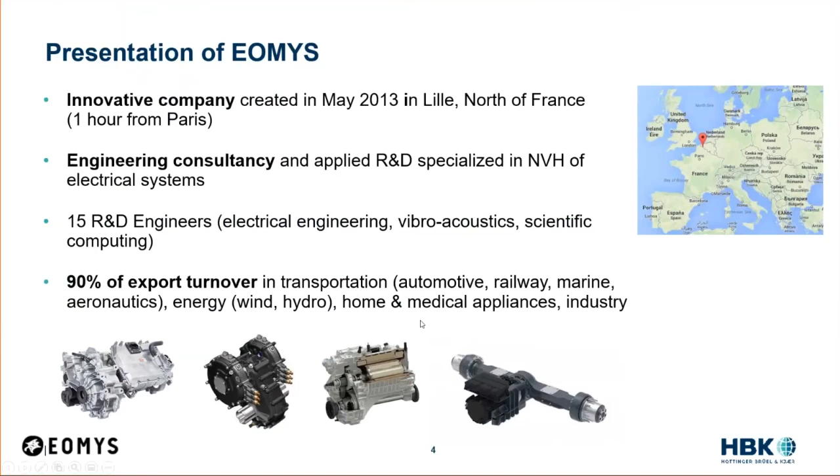So what we do at EOMYS is we propose a large choice of consulting services, starting from troubleshooting of NVH issues in electrical systems. It's mainly done via measurement, but also simulation. We also optimize the design of electrical systems, mainly based on simulation. On top of that, we provide technical trainings on vibroacoustics of electrical systems, and we develop and distribute our own software, which is called Manatee.

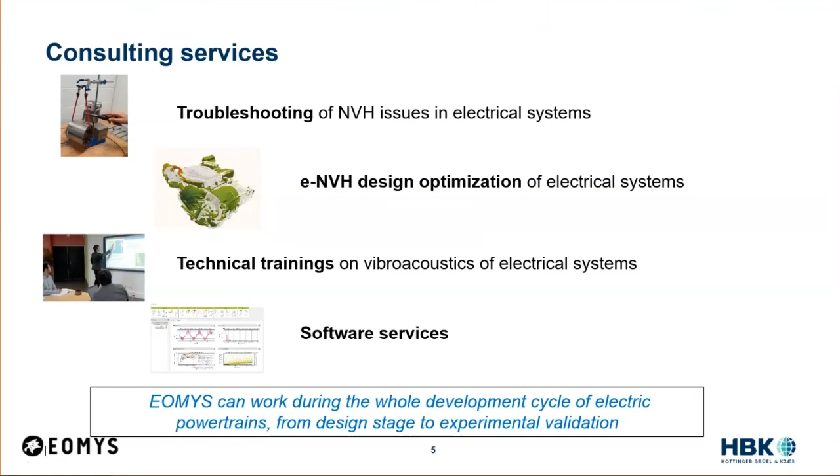So globally, EOMYS can really work during the whole development cycle of electric powertrains, from design stage up to the final experimental validation. So why is it important to work on e-NVH? Just choosing the topology of the machine or the slot pole combination, we've seen from EOMYS experience that it can have a large impact on NVH due to magnetic forces.

The e-motor designers have to work, of course, on the electromagnetic parts, on the heat transfer parts, but more and more they need to integrate the vibroacoustic part as well. And the thing with vibroacoustics is to really understand the e-NVH excitations. They are pretty complex, and their transfer paths are pretty complex as well. The noise issue can come from a force on the rotor or on the stator. It can be due to a radial force or a tangential force.

The propagation can be airborne or structure-borne. And the noise issue can be due to a resonance or not. It can be due to a specific slotting harmonic or a switching harmonic on the machine. And it can impact as well the global sound quality of the product. So that's why it's very key to integrate noise and vibration in the design of electric machines.

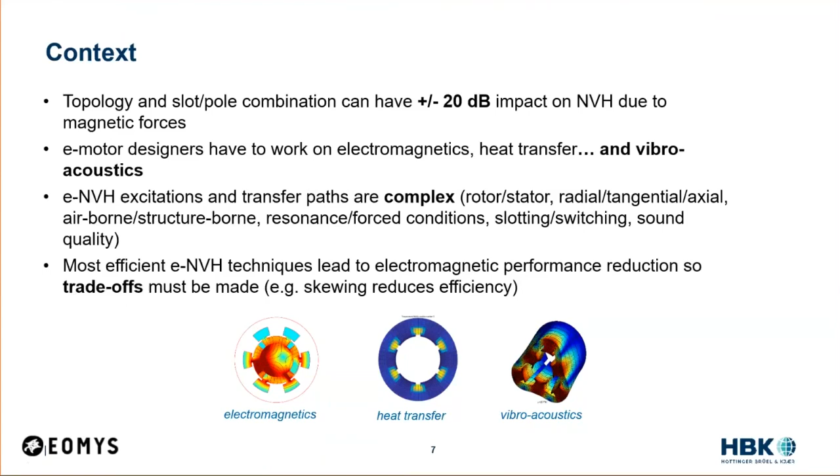But to analyze the e-NVH, the first thing will be to really understand the generation process of this noise due to magnetic excitation. The idea is to start with the current, which is going to create electromagnetic forces on the stator teeth. Those magnetic forces then make the structure vibrate, which will then create some noise if it occurs at an audible frequency.

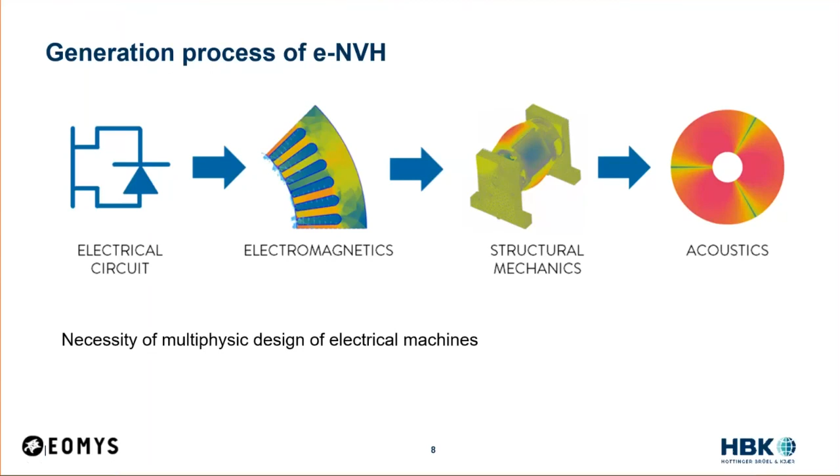So to really assess the noise due to electromagnetic excitation, the idea is not to focus on the acoustics, but to integrate the full multi-physics design of the electric machine. It is important to really understand the source of the noise problem. Usually we associate a given magnetic force with a frequency, a specific harmonic. But we characterize a given magnetic force as well by its wave number, which corresponds to the spatial distribution of the force along the air gap.

So here you have an animation made with Manatee software, where you can see as a function of time the distribution of the forces applied on a stator tooth. But actually, these global forces can be decomposed as a superposition of several magnetic forces. Here you have the magnetic forces of wave number r equal to 0.

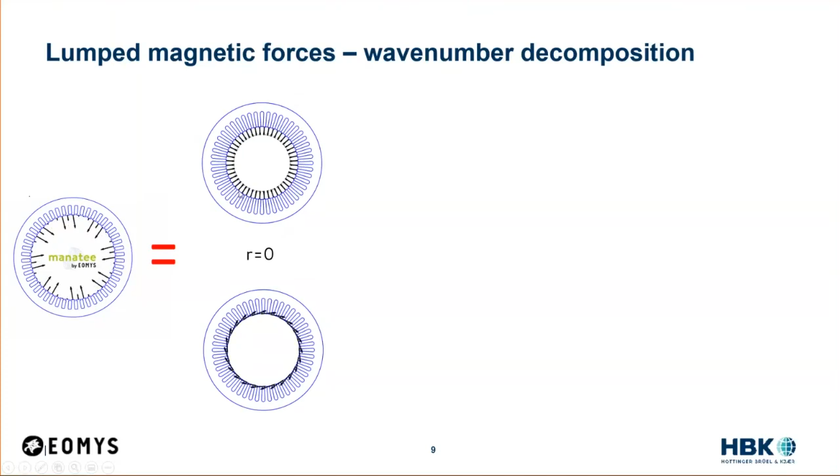So why it is equal to 0 is because along the air gap, you can see that there is the same amplitude of the force. So here we have an example of pulsating radial forces where the forces are radial, and in the bottom it's a tangential pulsating force. So it's what corresponds to torque ripple, for instance.

And then the combination includes as well some forces of wave number r equal to 1, where you see in function of the circumference, there is one maxima, one minima at a time. That's why it's r equal to 1. And in the radial direction, this corresponds to the unbalanced magnetic pull.

And after 1, there is 2. So you can see here an example of a force of wave number plus 2, where there are two maxima and two minima at a given time. So this is in radial direction again, and you can do it up to a very high wave number.

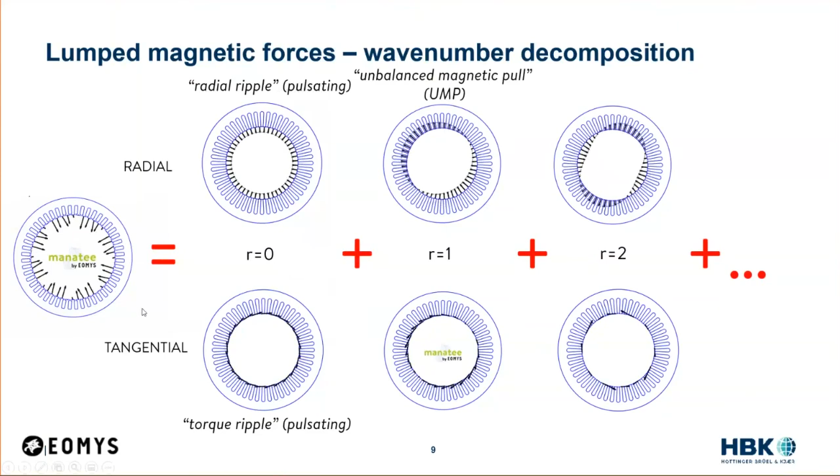So from there, you see how to characterize a given force. And it's actually very important to identify when dealing with a noise issue, to have the link between the forces and the noise. So it's what Manatee can help you with.

So this software's objective is really to improve the NVH performances of electrical systems throughout their development life. So the idea is to make the link between the e-machine geometry and its control parameters to the system level sound power level due to magnetic forces.

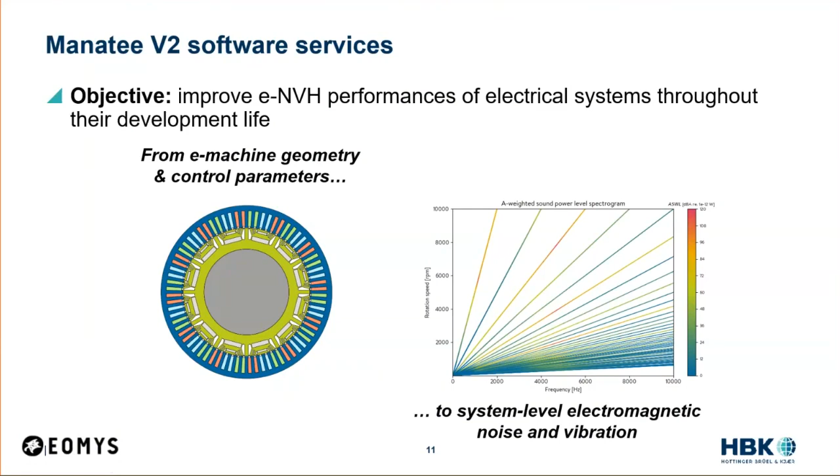So Manatee is the only software specialized on the electromagnetic design optimization of electrical systems. It includes, of course, the magnetic vibrations and acoustic noise due to Maxwell forces. So the software provides some predefined simulation workflows, which is very handy to set up quickly a simulation. So some of the workflows are dedicated to early design phase, and other workflows are more detailed.

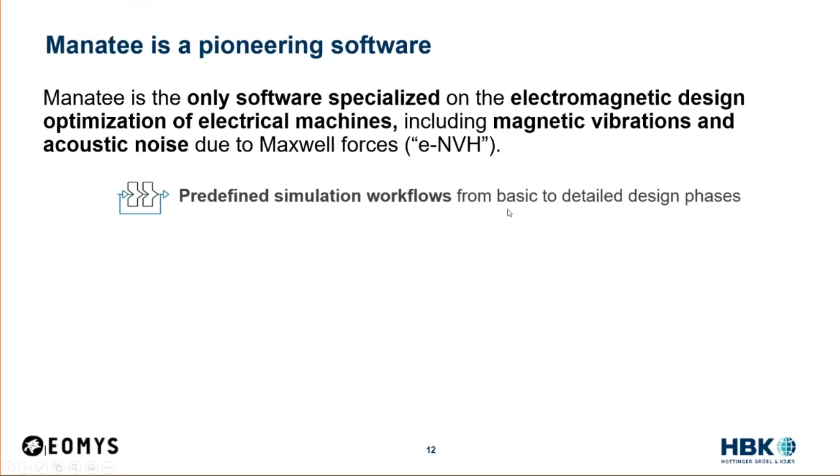Then it will provide you fast and accurate calculations, and Manatee can be used as well to study the impact of manufacturing tolerance, for instance, and assess the robustness of an existing design. And it can as well help you to identify the root cause of the noise problem based on automated post-processing you can access at the end of the simulation.

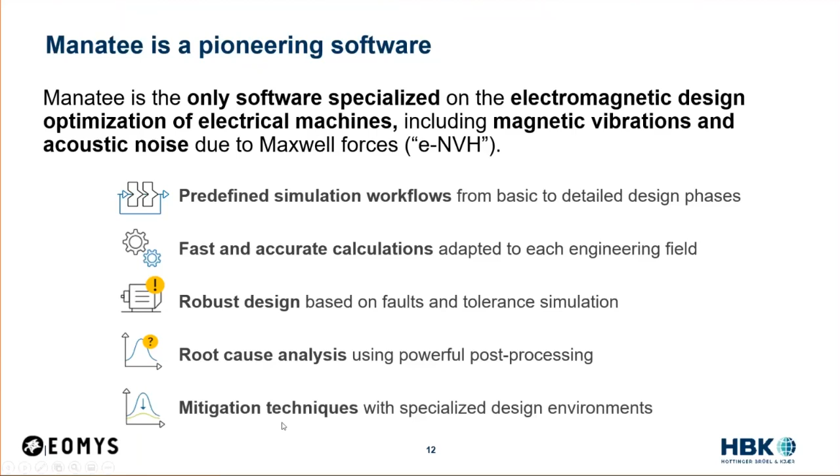And of course, here you can apply specific mitigation techniques such as skewing to reduce the noise of your machine. So this software has been inspired by EOMYS consulting experience, where EOMYS was able to reduce up to 40 dB the noise on a given design. EOMYS has experience on more than 170 industrial cases through a wide range of topologies and through a wide range of applications.

So the idea with the software is really to provide an integrated e-NVH simulation and analysis environment to electrical engineers, to mechanical engineers, and to acoustic and test engineers. So the current version addresses mainly the electrical and the mechanical engineers. And in the future, we will integrate more features dedicated to acoustic and test engineers.

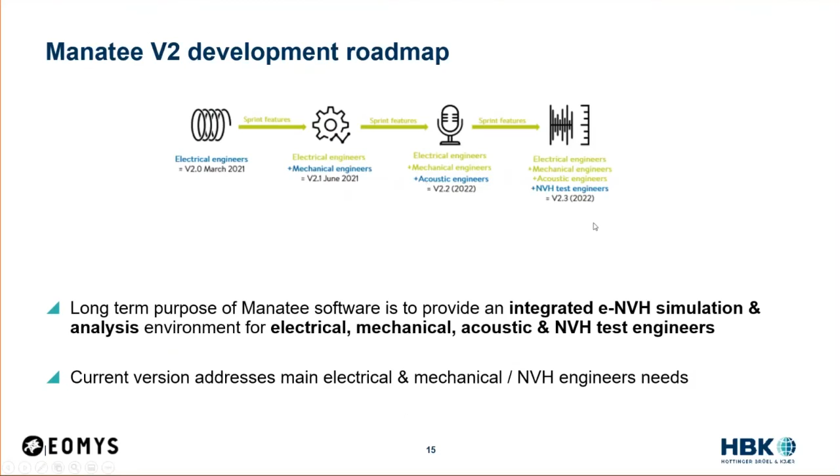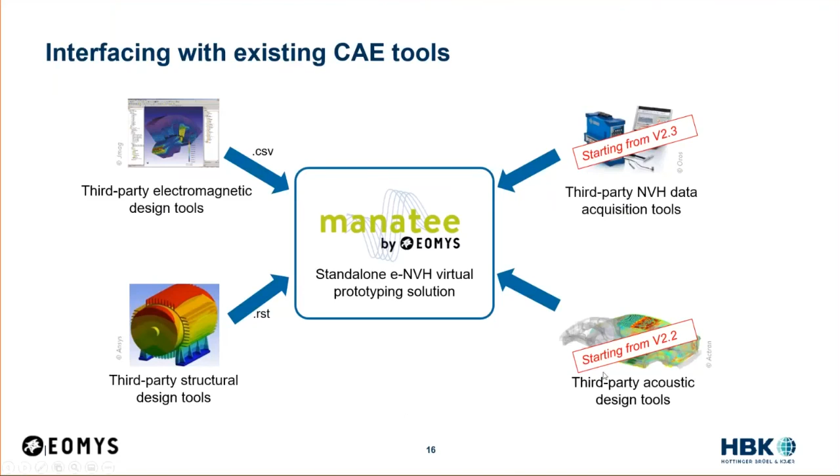So what Manatee can do as well is being interfaced with existing CAE tools. So for instance, here it's possible to import some electromagnetic flux calculated with JMAG software. Here from the mechanical side, it's possible to import some modal analysis results calculated with ANSYS, or it can be OptiStruct. And in the future, it will be possible as well to integrate some test data so that a direct comparison between measurement and simulation can be done. And we plan as well to make possible the import of radiation efficiency from Actran software, for instance.

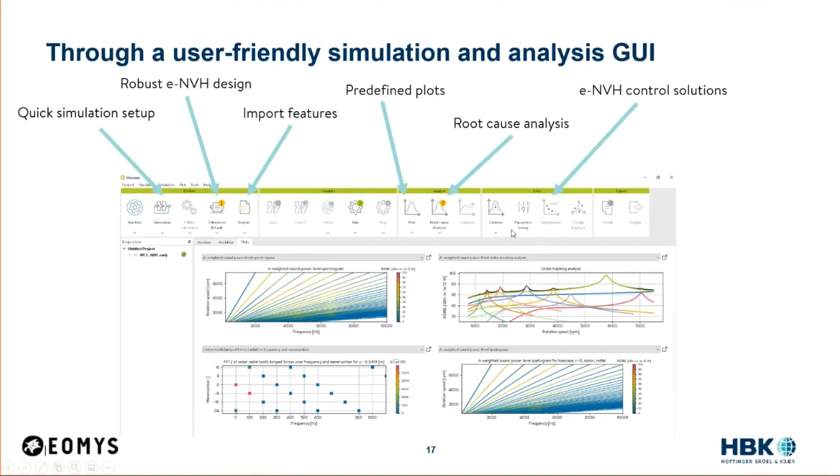So if you have a look at the user interface of the software, just by looking at the icon banner, you get an idea of how to use Manatee. So first, there is a need to define the machine. And then the idea is to select a predefined workflow, to apply or not some tolerances. And then you can save and run the simulation. And from there, you have access to predefined plots. You have an example there, which will allow you to better understand the origin of the noise issue. And once it's done, you can solve the noise problem by integrating specific solutions.

So why is Manatee fast and accurate? The first thing to mention compared to general CAE tools is that it's really easy to set up the simulation with Manatee. So even if there are multi-physics models behind, everything is well predefined with Manatee. So there are different workflows you can select by default. Some will be more dedicated to early design stage, others to more advanced design stage. And you'll see that here you'll get an automatic coupling between the magnetic model and the force model, for instance, between the force and the vibration, and between the vibration and the acoustic.

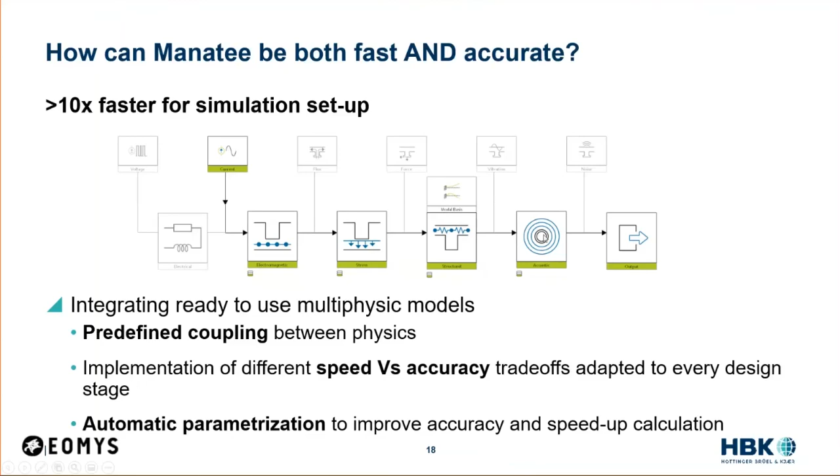Then, in terms of calculation time, Manatee is very fast. The first reason is from the magnetic model. Usually, the magnetic flux are represented using what we call a magnetic lookup table, which then allow you to speed up calculation at variable speed. So this is by using flux interpolation or flux extrapolation.

Then, from the structural point of view, as it's possible to import modal bases from ANSYS or OptiStruct, we've seen that the import can be performed offline, so that offline, the software is calculating the response of modal shape envelope nodes to some specific load case. So the load case here will be the different magnetic forces, for instance, a magnetic force associated to wave number 0 and applied in a radial direction.

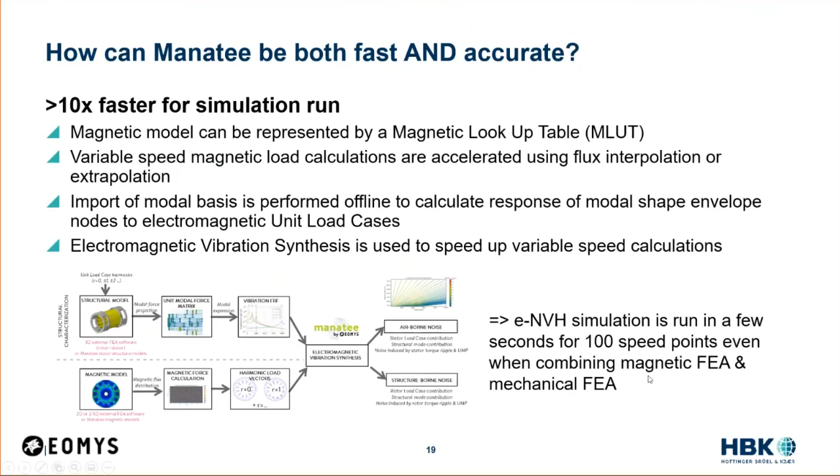And then we'll be using the electromagnetic vibration synthesis here, which is combining on one side the structural behavior, on the other side the magnetic behavior, to calculate airborne and structure-borne noise at variable speeds. So within few seconds, you get access to 100 speed points, even when magnetic FEA and mechanical FEA are used.

Then another advantage of Manatee is that the post-processing is automatized, and by default you get access to the 4 most relevant visualizations. So here, for instance, you see a spectrogram of sound power level in dBA, which is highlighted, together with the order tracking analysis. Then by default here you have access as well to the 2D plot of the forces. We'll come to that a bit in more detail just after.

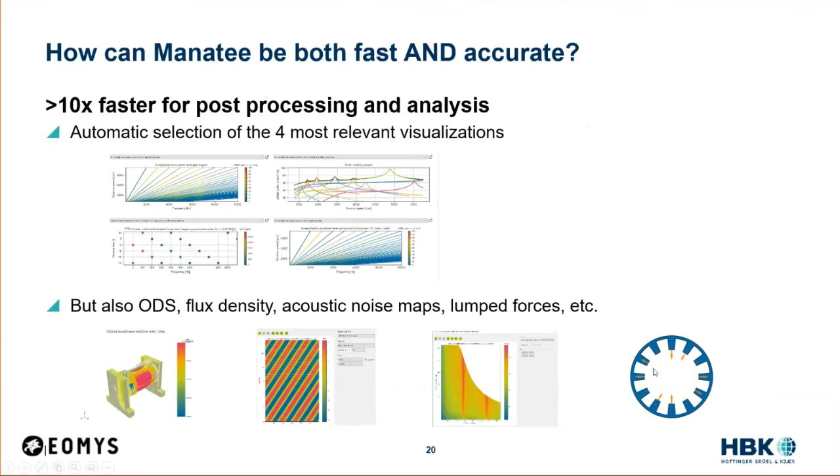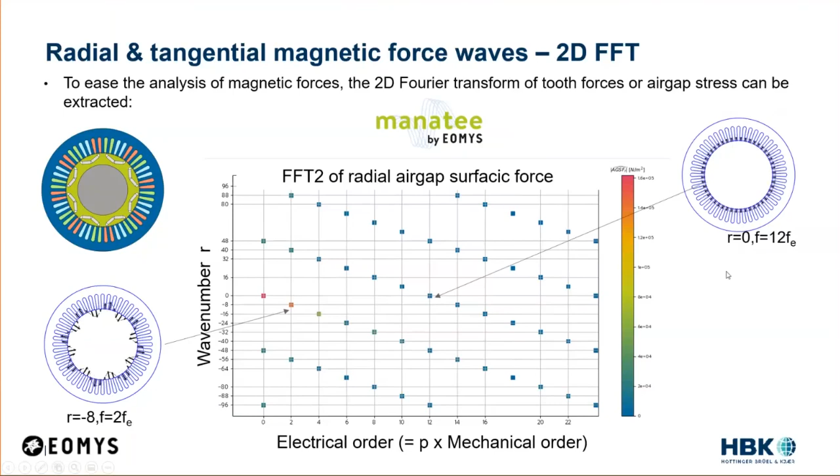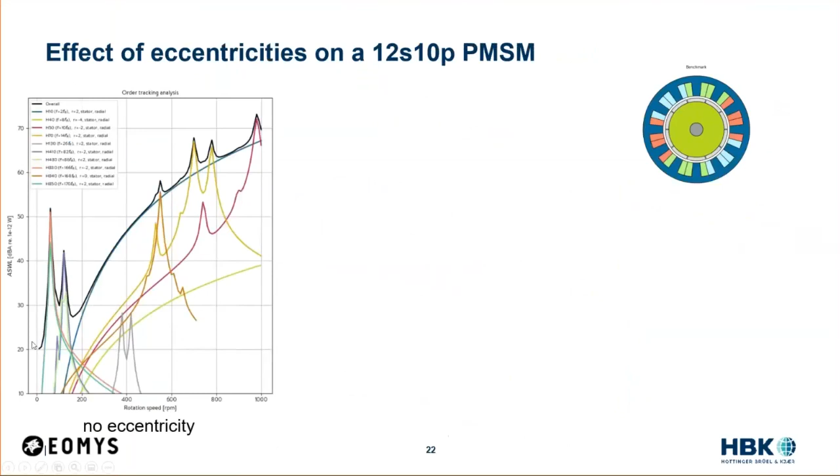Then we've talked about the possibility to study some eccentricity defaults. So here on a different machine, you have an example of the order tracking we get without any defaults. And then by applying 20% of static eccentricity, you can see here that there is a new resonance which is occurring. And this new resonance is associated to a wave number 1.

And looking at the operational deflection shape from this excitation, you see that the peak corresponds to a bending mode. So actually, it's what we would expect: an excitation of wave number 1 being in resonance with a bending mode.

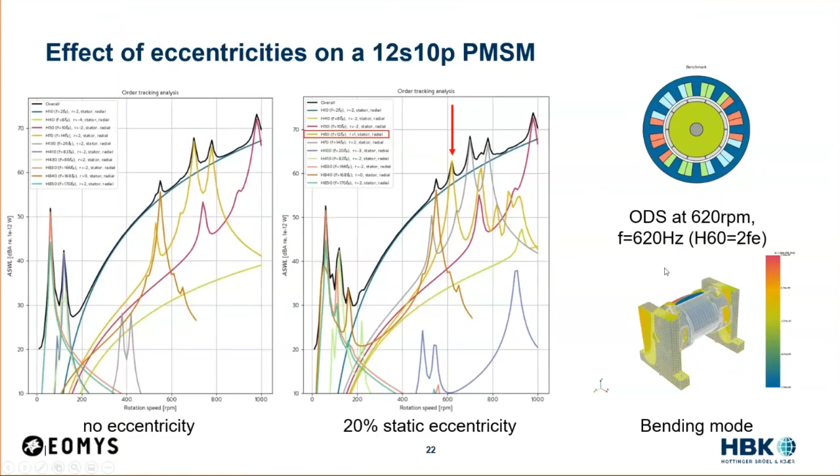Then here is an example of a design optimization. So the rotor can be skewed in different ways. The skew can be linear, in V-shape, or in zigzag shape, as it's shown. And depending on that, you'll have a different impact on the sound power level. So in this typical example, you see that there is up to 10 dB benefit using the V-shape, but this is very specific to the motor we studied. And you see here as well that whenever the rotor was skewed, there was a negative impact on the torque, of course.

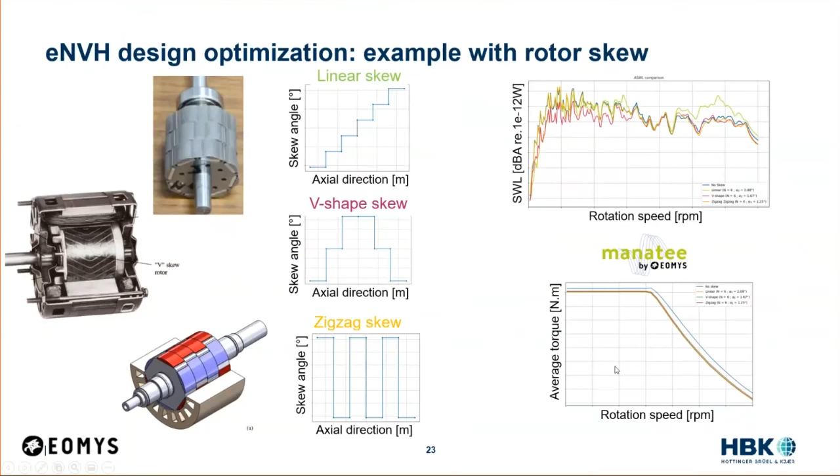So to summarize, Manatee software is a pioneering software specialized in the assessment of magnetic forces, vibration, and acoustic noise. It allows you to troubleshoot and reduce the noise of electric systems. And it's made to make the collaboration between electrical, mechanical, and acoustic engineers easier. And it's developed based on our experience at EOMYS. So this is mainly focusing on simulation, but of course simulation always needs to be fitted based on experiments.

So I give the ball to Ed. Thank you for an excellent presentation.

Can I just ask you a quick question? Very early on, you mentioned that there were trade-offs whenever you were doing a design and picking optimal pole slots and skewing. Those kind of impact efficiency, but is it a large impact on efficiency generally in your design experience? Yeah, it can have a large impact on efficiency. That's why it's always needed to make some simulation to assess this impact, and as well to collaborate with electromagnetic engineers to make sure that everything is well controlled.

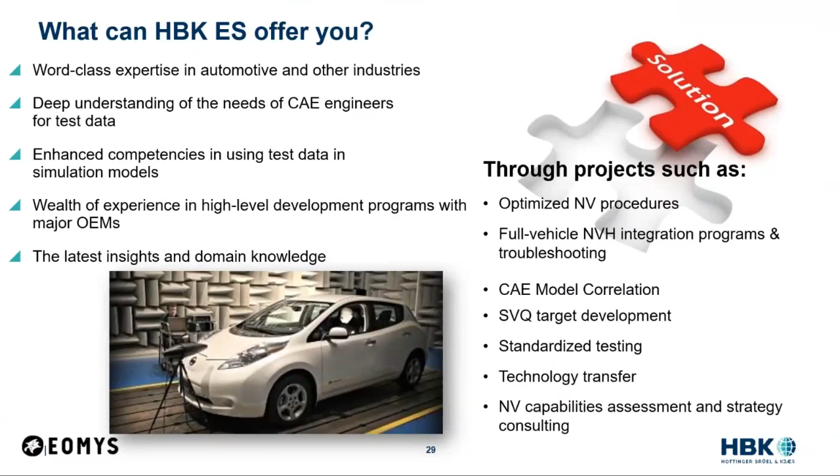I'm in a group called Engineering Services. Within B&K there are 1,000 employees making microphones, handheld sound meters and all the different types of equipment. But there's also a group of us that provide an expanded offering for our customers with measurement services, and that's what I do. There's 16 of us here in Detroit who do measurement services, specializing in noise and vibration. There's 6 people in the UK doing noise and vibration. There's about 40 people in Europe doing strain gauging and strain measurements, and a smaller group in Asia that do sound and vibration measurements and strain gauging. That's what the engineering services part of HBK does, and that's what I'm a part of.

I'm lucky enough working in Canton to work in a beautiful lab that we're co-located in, and we lease rooms from Material Sciences Corporation. We have a four-wheel drive NVH chassis dyno, a beautiful dyno. We also have 2 hemianechoic chambers that are huge. They're 25 feet by 35 feet by 14-foot roof, so they're big enough to pull a car or a small truck into. But we also do a lot of work with appliances.

We have a fully anechoic chamber, which has the fake floor and the wedges underneath. It's smaller, I think 14-foot by 14-foot by 10-foot roof, but it's also much quieter than the hemianechoic rooms. On a typical day, we're 16 or 17 dBA in that room. So it's a very quiet room, and it's great for measuring electrical equipment because it's generally quieter. We also have a sound transmission loss suite, with connected reverb and anechoic rooms that we can use to measure sound transmission loss.

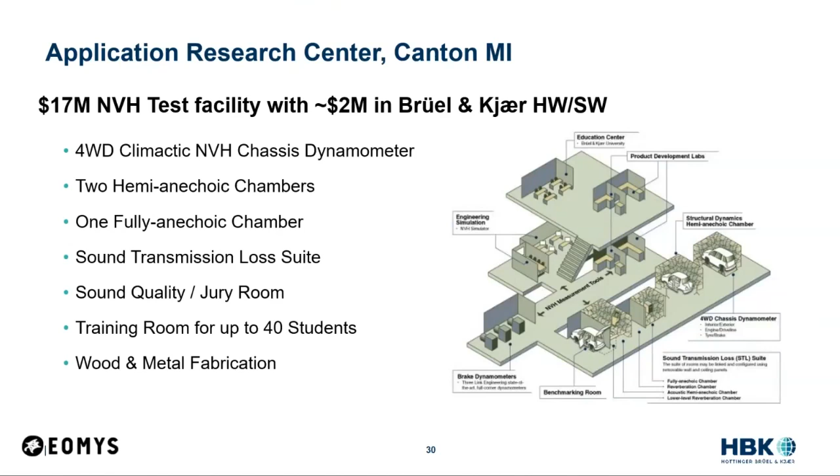Okay, why measure to improve noise and vibration? Or you could put this a different way. If the software can very accurately predict the noise performance of electric machines, then what do measurement people do? What's the role? How do they complement each other?

Well, first of all, model validation. Whenever you make any type of model, there are certain assumptions that need to be made and validated. Even in mature software, new designs are constantly coming along, and those new designs challenge the assumptions made in the model. So we can measure to validate and compare between the real product and the model product. We can do that by comparing natural frequencies, since a big part of predicting noise and vibration is modal superposition. It's important to get the natural frequencies and the mode shapes correct. So that's one of our roles.

Another role is to look at operating deflection shapes, to compare what the model thought the results were going to be and what is actually being obtained. And then also comparing other outputs such as vibration, torque ripple, and sound levels as a function of speed and load.

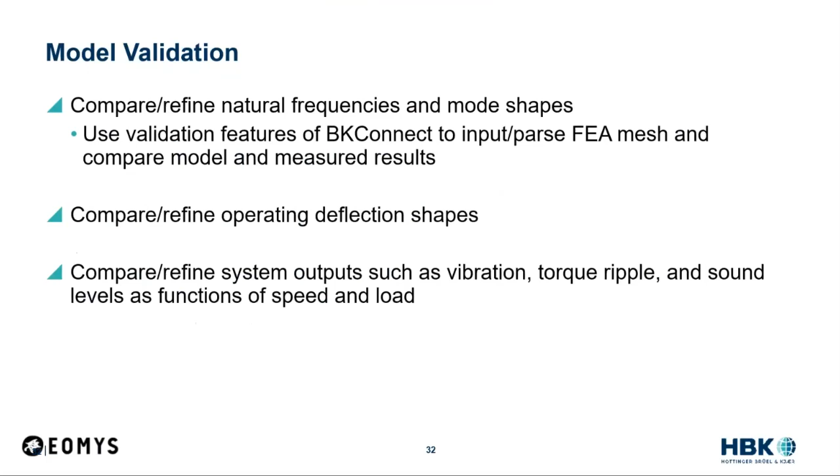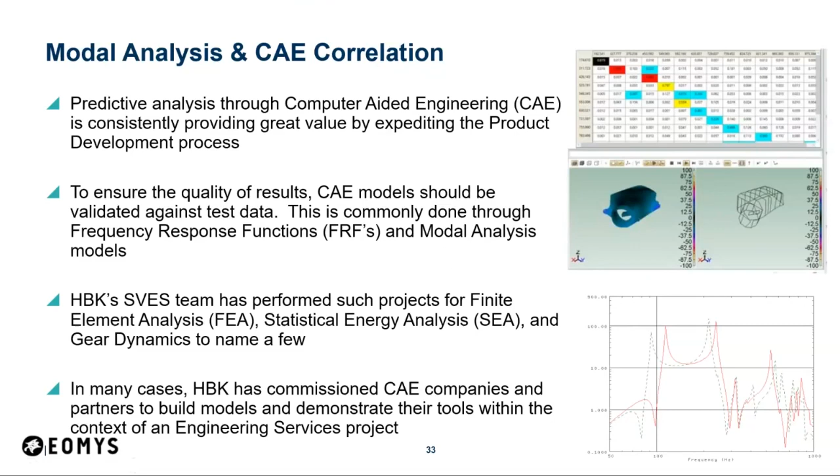Our BKConnect software has specialized features that allow us to compare the modal results between the CAE model and a real measurement. You can see my pointer here. If we start out with a fully meshed product, we can parse that down to discrete points, so that when we're making measurements, they correspond to actually numbered nodes on the model. Then we can look at the correlation between the measured and predicted natural frequencies in a modal correlation table, and also graphically, as shown in the bottom right, in order to refine the model to get the best possible correlation between the two.

We can make measurements of operating deflection shapes. This is a demonstration that we did on an experimental motor at the Illinois Institute of Technology, where we wanted to see if we could use the HBM Genesis high-speed system to acquire the data and do an operating deflection shape, which we were able to do quite well. We laid out a grid on the stator and then measured its displacement at a particular frequency.

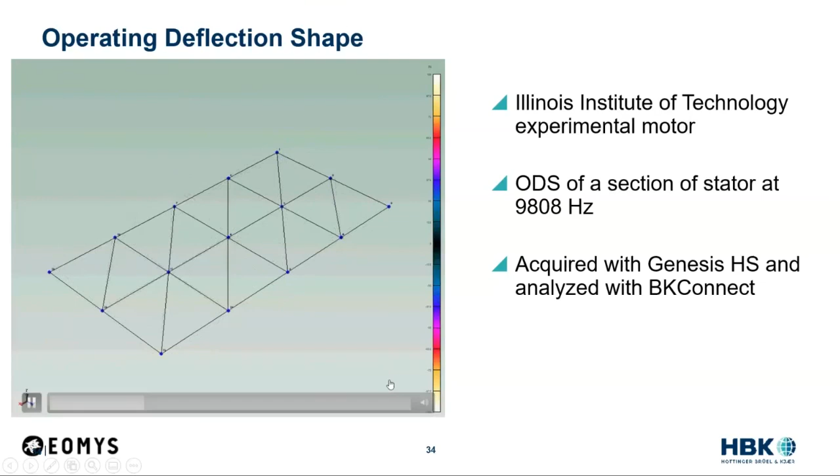Doing the modal also provides a measurement of damping, which can be very useful. Trying to predict damping and insert it into a FEA model can be very difficult. It's fairly simple to set up an accurate structural model, but if you want to add damping, all of a sudden you need all that detail, all the joints and the connections and the viscoelastic materials and all of those things. That can tremendously increase the number of degrees of freedom of your model, maybe to a point where it's not as efficient as it could be.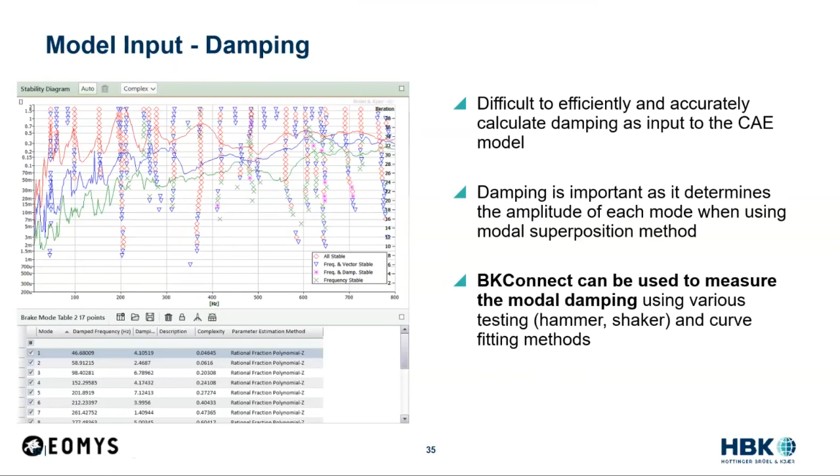So by measuring the damping, those realistic damping values can be inserted into the superposition model and come up with a very efficient structural solution and modal superposition solution for noise and vibration. And the point there being, it's easier to measure the damping than to do all that detailed modeling.

Troubleshooting. Sometimes things don't perform as you expect the design to do. This is a result of an 8 kilowatt fan that we measured, where we did a descending speed sweep. So we started out at 100% speed and decreased down to 20% speed. The vertical axis is speed. The horizontal axis is frequency. And we see here that we have several orders. The diagonal lines are orders. We see this one right here is the fourth order.

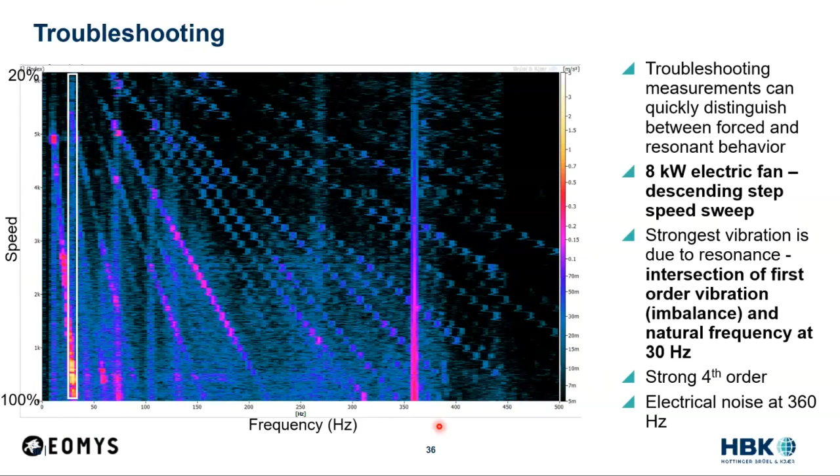But our real vibration issue here is this area right here. What we have is the intersection of this first order with this vertical line, which represents a natural frequency. So we have a 30 hertz natural frequency that's getting excited by first order, which means that we have a combination of an imbalance issue with a natural frequency that needs to be addressed in order to reduce vibration levels.

We can use the acoustic camera to better visualize the noise pattern of an electric motor. In this case, we're back to our experimental electric motor at the Illinois Institute of Technology. And this is a visualization of the noise radiation at very high frequencies between 8,700 and 11,000 hertz. We were also able to use this to see how much noise was actually being produced by the dyno motor.

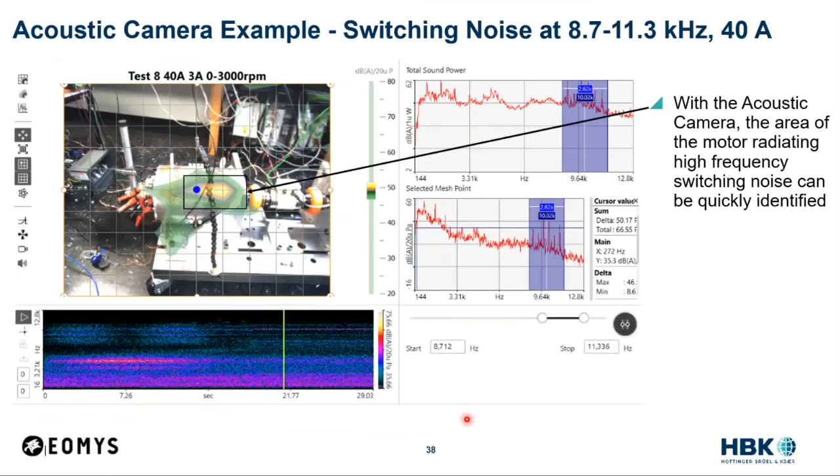We can look at the electric machine as a black box and do other things with it too. So in this example, we're looking at the electric powertrain of a car, and we are making measurements on a car that has an induction motor, and playing the what if game: what if we substitute a high efficiency SRM motor, a switched reluctance motor, into that? We know that the switched reluctance motor has much more torque ripple and more vibration in general,

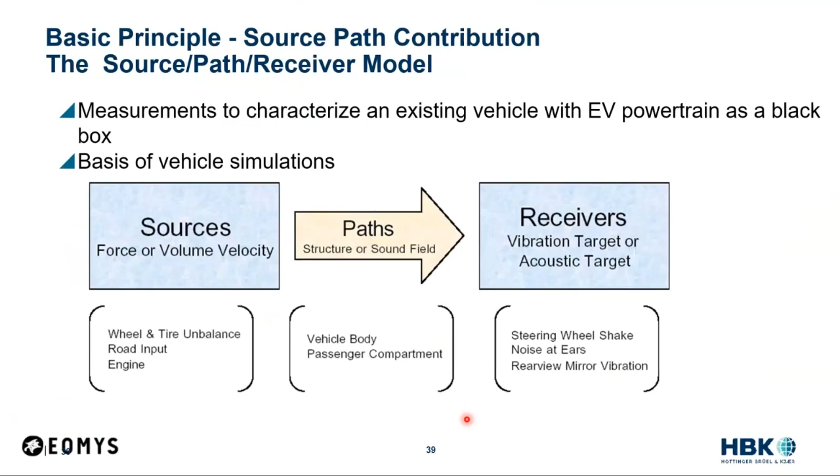but does it produce a drivable car? So we can make a bunch of measurements to characterize the car as a path and to characterize the electric motor as a black box, and then do this virtual substitution in order to see how it's going to be. And then as a final step, determine what type of remediation needs to be done for the switched reluctance motor, and look at the implications of cost and weight.

We have a very powerful tool in the Genesis high-speed system. This is a system normally used to do electrical analysis, and it measures sample rates up to 250 megahertz with 64-bit resolution. It can measure voltages up to 1,000 volts, in other words, from minus 1,000 to 1,000 volts peak. But it also has the ability to take inputs from accelerometers, microphones, and torque meters,

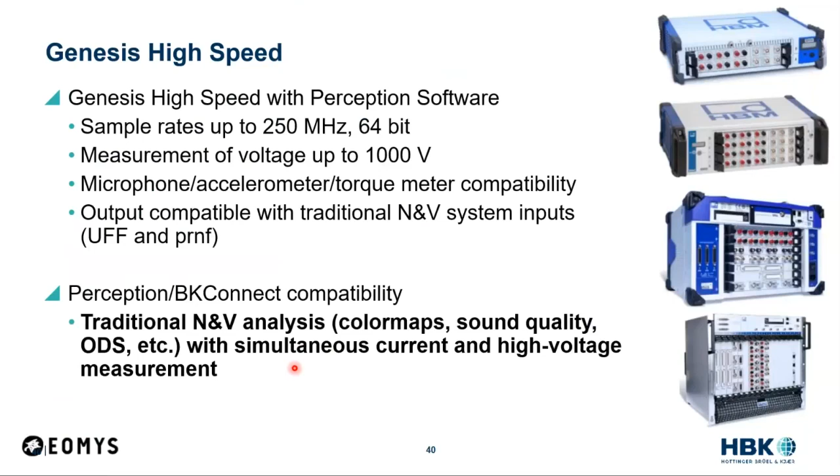and make simultaneous measurements of the real voltage signals and the real current signals being fed to the electric motor, and look at the resulting vibration and noise all in one system, so that we can do traditional NVH analysis such as color maps and ODS, but also simultaneously look at current and voltage. It's very powerful for inverter tuning as a means of improving noise and vibration performance.

And finally, systems. You can make 1,000 motors, and some of them are going to be different than others. So our Discom division produces end-of-line systems that can make end-of-line measurements of electric powertrains as they come down the line. 10 years ago, these guys were measuring thousands of transmissions every day. Now half of what they do is electric drives.

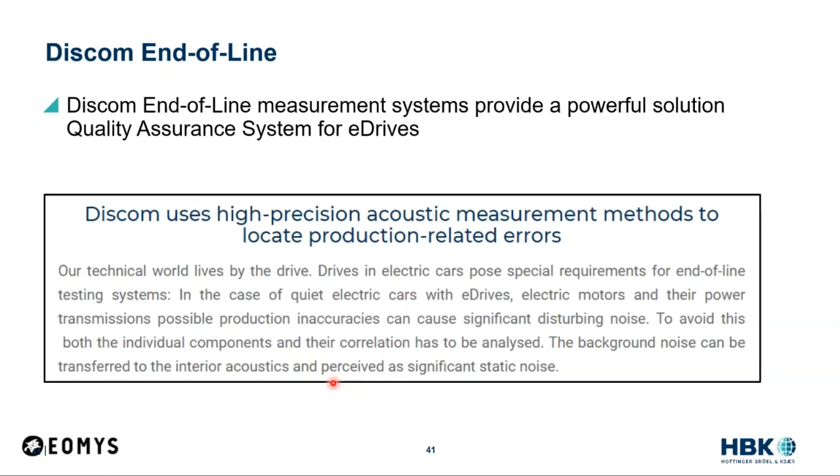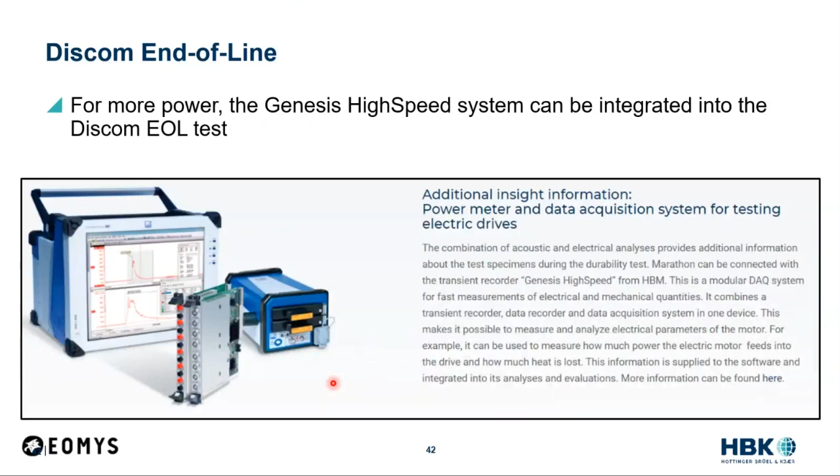I think that's, don't quote me on that, but a lot of what they've transitioned over to is looking at electric drives for vehicles and quantifying those in the same way they used to do transmissions. And it also has the power of being able to work with the Genesis high-speed system to look at the electrical parameters associated with the end-of-line performance.

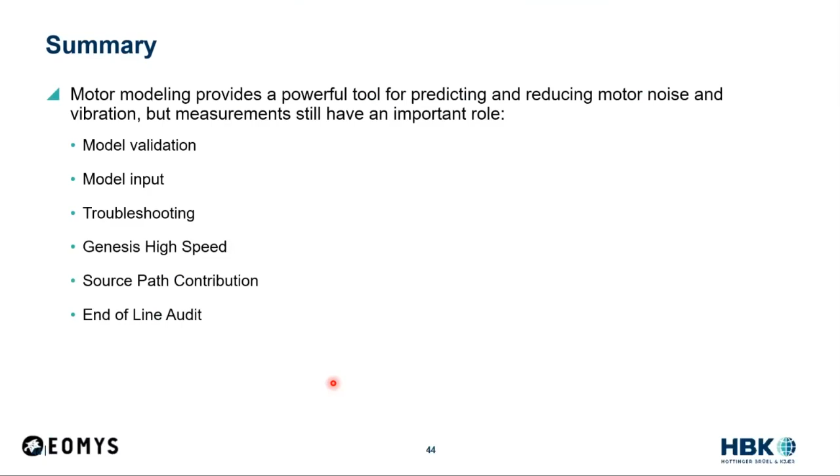So in summary, the role of measurement is we provide model validation, model input in the form of being able to provide the damping to go into the model, troubleshooting, the ability to combine high vibration measurements with electrical measurements, source path contribution to come up with simulations, and end-of-line measurements.

Thank you very much. I think while I have the floor, I will also address the EOMYS HBK collaboration. We are two different companies, and we do both have different specialties. So the idea is that EOMYS provides design, they can provide measurements, we can provide measurements. We both have special talents in different equipment depending on the level of support that's needed. And then the experimental validation was something we'd work together on.

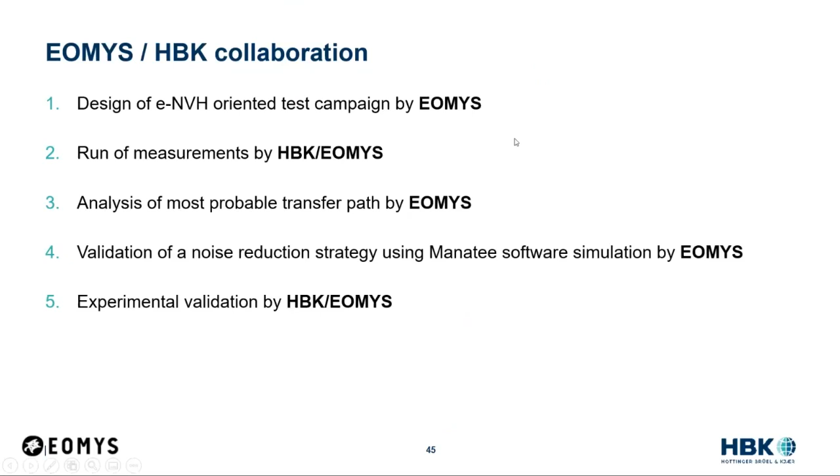So, Corinne? Maybe just based on the measurements, the idea would be that we can use EOMYS specialty to analyze the measurements and identify the most probable transfer paths, as you mentioned earlier. And based on that, we could then, this time by using Manatee software, simulate the design and validate a potential noise reduction technique that we would pick. And if one of the reduction techniques can be implemented, then the idea would be to validate from an experimental point of view the results of the simulation. So this is kind of the whole EOMYS HBK collaboration.

Maybe I have one note regarding the end-of-line testing you were mentioning. Applied to electric motors, it's something that is important and that we can use to analyze if there is a default or not on the motor. So for instance, in case of dynamic eccentricity, we would directly see on the measurement spectrogram if there is a problem with that or not. So here it's really making the link between simulation and measurements. Well put.